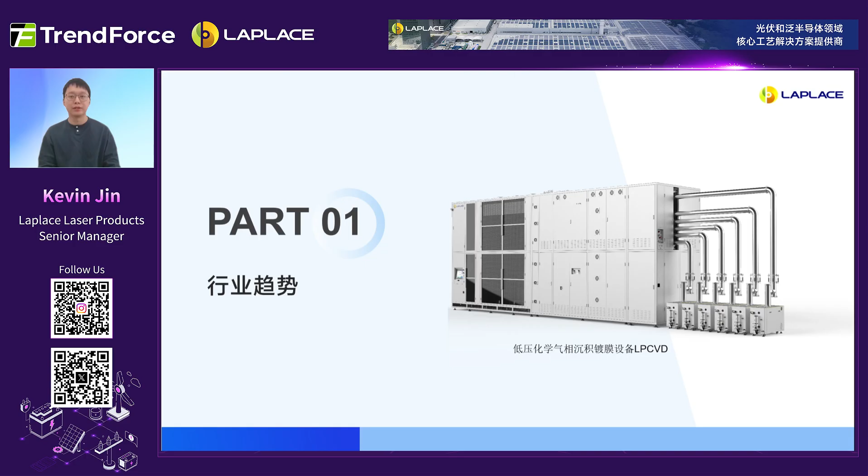Next I will present a report on the role of laser technology in N-type high-efficiency photovoltaic PV cells and share our achievements. The report will be divided into 4 sections: industry trends, efficiency enhancement pathways, solutions, and Laplace introduction. Part 1. Industry trends. I will mainly introduce the mainstream solutions for the N-type battery technology roadmap and the application of laser technology within them.

First, regarding the industry background, domestic demand for high-power module tenders is gradually increasing. Currently, the Chinese PV market's demand for high-power modules is showing a growth trend and has become the preferred choice for end customers. According to TrendForce data, in November 2025, tenders for modules over 570 W accounted for more than 60% of the scale, and demand for power ratings over 600 W and 700 W continues to rise.

Leading companies such as Trina Solar, LONGi Green Energy, and Jinko Solar have achieved mass production of modules over 700 W and are continuously improving product performance through technological upgrades. In terminal projects, the application scale of modules over 700 W is gradually expanding. Their advantages of high power, high efficiency, and low levelized cost of electricity, LCOE, are driving the industry to transition from scale expansion to quality improvement.

Overall, the current development model of the PV industry is shifting from extensive scale expansion to lean manufacturing driven by technological innovation. In terms of competition, it is shifting from homogenization and cost involution to achieving product premiums through differentiated technological paths. The increase in demand for high-power modules is the result of multiple factors, including policy support, technological progress, and improved economic viability.

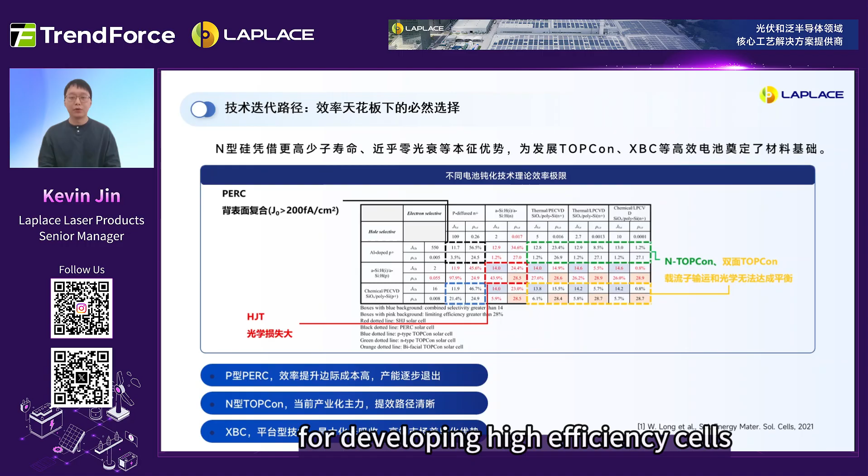The application of 210 mm large-size silicon wafers, along with standardization and promotion, optimizes module formats. While maintaining high power, it reduces module size and weight, improving installation convenience. Looking at the technology iteration path, N-type high-efficiency PV cells are an inevitable choice under the efficiency ceiling. N-type silicon, with its intrinsic advantages such as higher minority carrier lifetime and near-zero light-induced degradation, lays the material foundation for developing high-efficiency cells like TOPCon and BC back contact.

The chart below shows the theoretical efficiency limits under different passivation technology routes. It can be seen that for early P-type PERC cells, the theoretical efficiency limit is 24.5%. The back surface recombination current density, J0, being greater than 200 fA/cm² is the main constraint on efficiency. In industrialization, as efficiency approaches the theoretical limit, the marginal cost of efficiency improvement is high, and capacity is gradually being phased out. For HJT, heterojunction, cells, they use intrinsic amorphous silicon plus doped amorphous silicon for passivation. The main constraint on efficiency is high optical loss, with a theoretical efficiency limit of 28.1%.

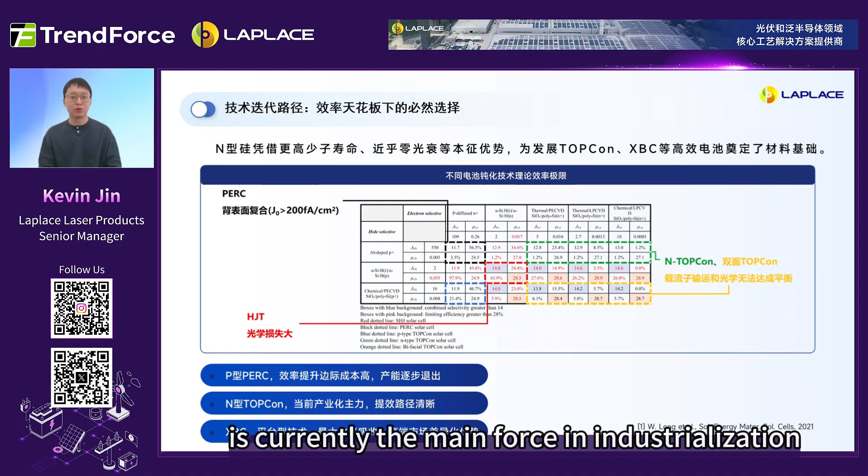For TOPCon cell technology, if a double-sided tunneling oxide layer plus polysilicon layer passivation is used, the conversion efficiency upper limit can reach 28.7%. Therefore, N-TOPCon is currently the main force in industrialization, with a clear efficiency enhancement path. However, its main efficiency constraint is the inability to balance carrier transport and optics. If we transfer both the N-type and P-type structures of TOPCon to the back of the cell, we naturally transition to the BC route. Through the BC platform technology, optical absorption can be maximized, and the conversion efficiency upper limit can reach 29.1%, which can leverage advantages in high-end market differentiation.

Regarding industrialization pathways, in 2025, N-type TOPCon, with over 75% market share and mature cost-effectiveness, firmly holds the mainstream position. BC technology, with a share approaching 10% and higher efficiency, targets the high-end distributed market.

According to statistics from the China Photovoltaic Industry Association, CPIA, from 2024 to 2030 regarding the market share of different battery technology routes, in the next 5 years, N-type TOPCon battery technology will occupy the mainstream position, while BC technology will also see rapid growth and large-scale expansion.

Looking at the trend of production line investment costs for different battery types, due to first-mover advantages, TOPCon cells have lower initial equipment investment costs. For BC technology, the investment cost per GW in 2024 was about 300 million RMB. However, with the gradual localization and promotion of equipment and the maturity of the battery technology route, the investment cost per GW will also see a rapid decline.

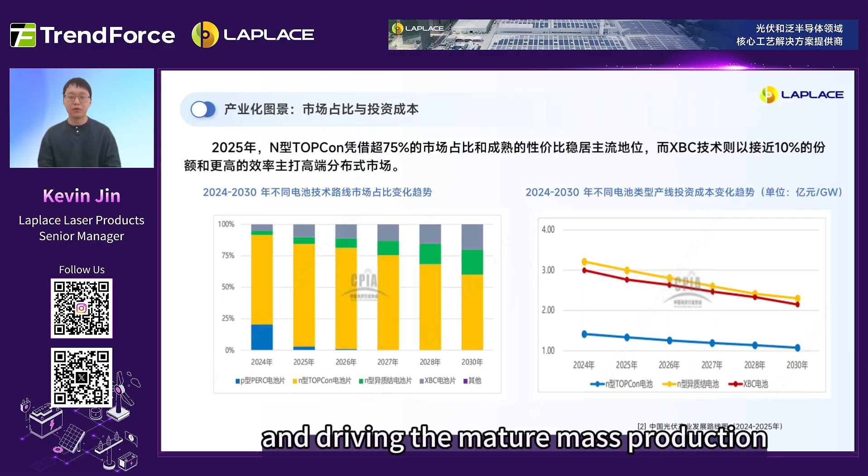Overall, as core process equipment gradually completes localization and replaces iterative technologies, rapid cost reduction can be achieved for technology iterations. From the perspective of trends, laser technology has been deeply embedded in the development of N-type high-efficiency cells from the beginning. Its high precision, low damage, and controllability are key supports for meeting sub-micron precision processing requirements and driving the mature mass production of technologies like TOPCon and BC.

Looking at the development path of laser technology, early TOPCon SE, selective emitter, technology used lasers to achieve local high temperatures for heavy doping in metallization areas. Moving to LECO, laser enhanced contact optimization technology, lasers play a role in carrier excitation. Under reverse voltage, high current density local hotspots are formed at the silver-silicon interface, promoting the formation of silver-silicon alloy junctions and reducing contact resistivity.

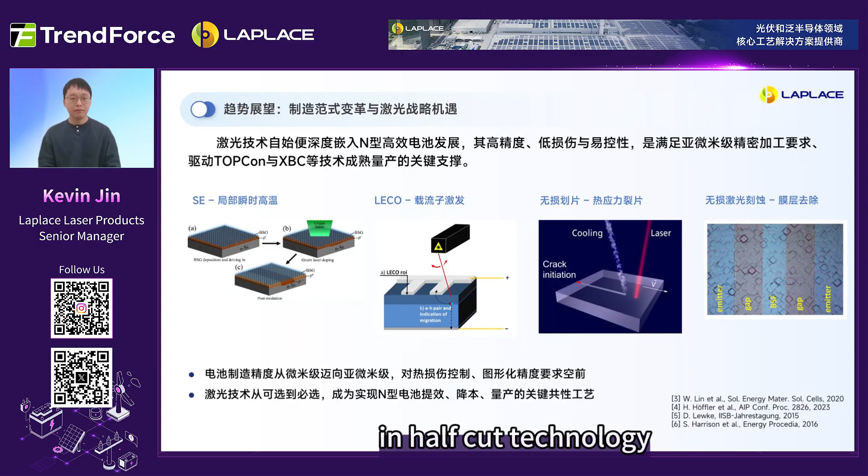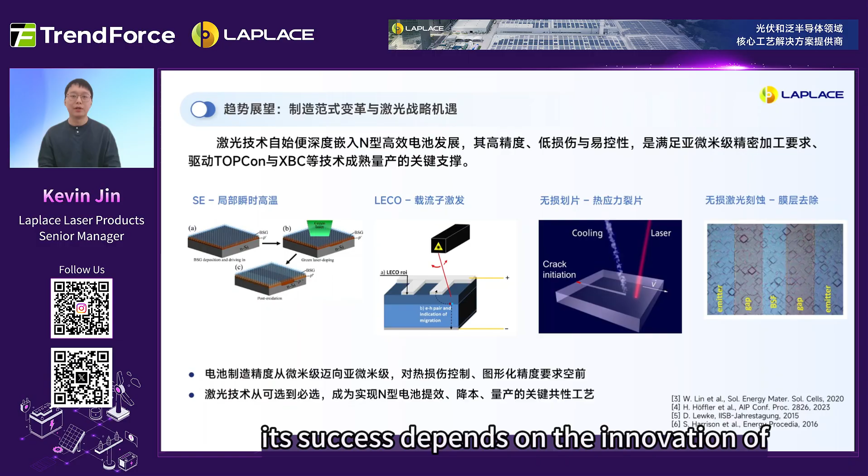In half-cut technology, local heating by laser and subsequent cooling jets create thermal stress gradients, achieving high-quality, non-destructive slicing through thermal stress cleavage. Currently, laser etching is widely used to achieve precise removal of local film layers via laser. Fundamentally, the N-type transition is a manufacturing revolution. Its success depends on the innovation of underlying tools like lasers that can achieve precision, flexibility, and low-damage processing.

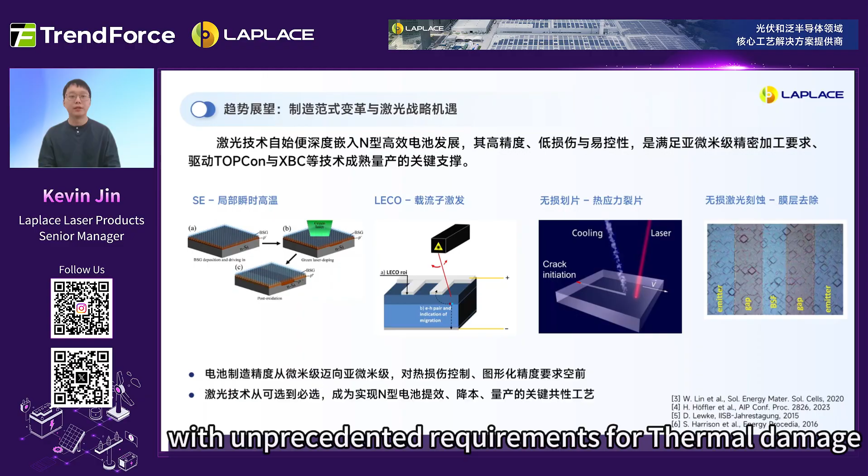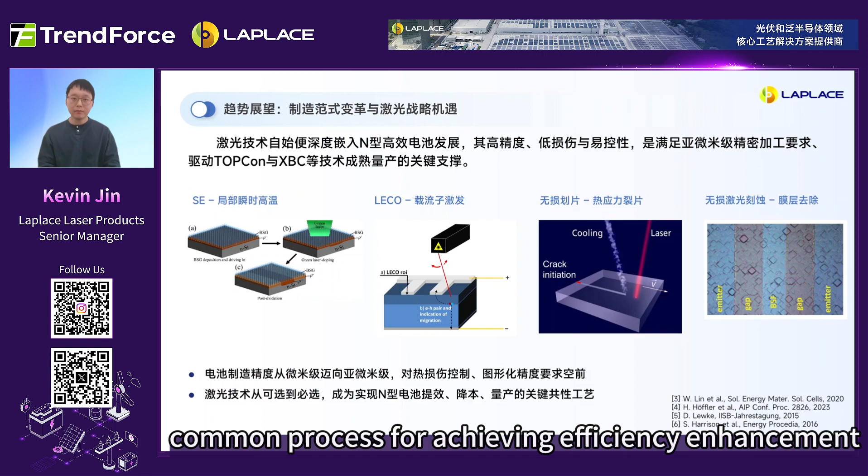From the battery manufacturing route perspective, manufacturing precision is moving from the micron level to the sub-micron level, with unprecedented requirements for thermal damage and patterning precision. Laser technology has moved from optional to mandatory, becoming a key common process for achieving efficiency enhancement, cost reduction, and mass production of N-type cells.

Part 2. Efficiency Enhancement Pathways. I will take TOPCon polyfinger, TBC, as an example to detail its efficiency enhancement methods and the necessity of lasers within them. First, a brief introduction to the TOPCon battery technology route. The high efficiency of TOPCon cells stems from the core passivation contact structure of the tunneling oxide layer. Through the structural synergy of an ultra-thin silicon oxide layer and a doped polysilicon layer, it achieves excellent chemical passivation, field-effect passivation, and carrier selective transport, thereby significantly reducing surface recombination velocity and improving open circuit voltage and conversion efficiency.

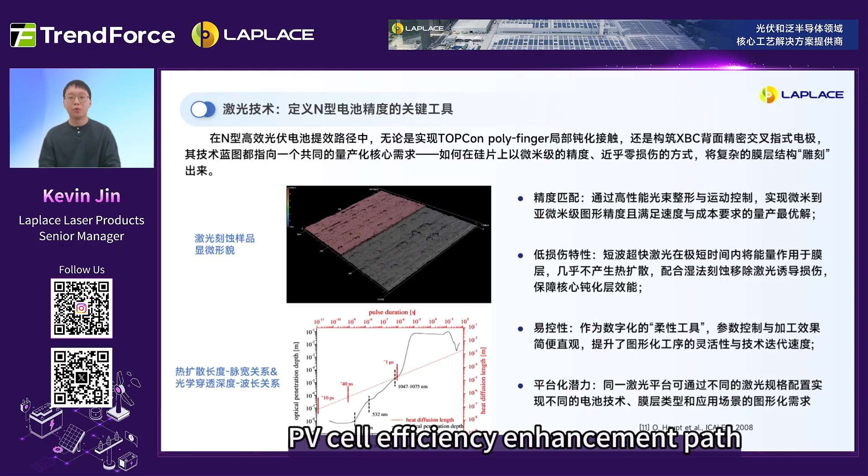Part 3. Solutions. I will focus on Laplace's process solutions and equipment status in laser etching. First, in the N-type high-efficiency PV cell efficiency enhancement path, whether realizing the TOPCon polyfinger local passivation structure or constructing the precise interdigitated electrodes on the back of BC cells, the technical blueprint points to a common core requirement for mass production: how to carve complex film structures on silicon wafers with micron-level precision and near-zero damage. Laser technology matches this application perfectly.

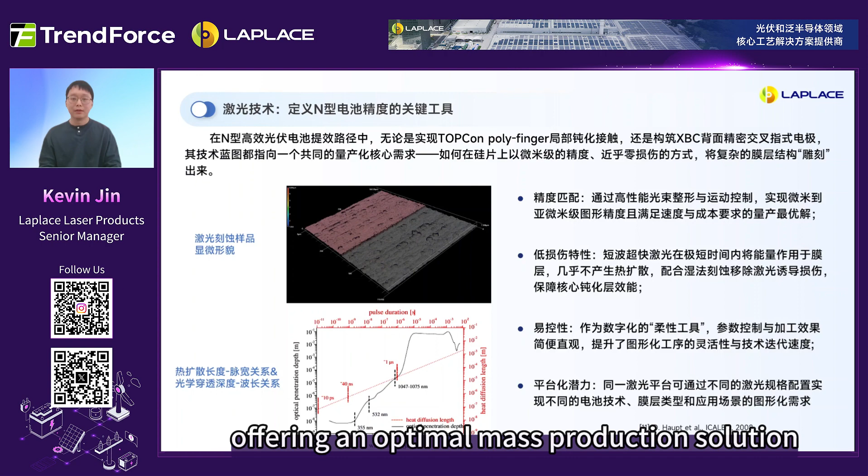First, regarding precision matching. Through high-performance beam shaping and motion control, laser technology can achieve micron to sub-micron patterning precision, offering an optimal mass production solution that meets speed and cost requirements. The image on the left shows the microscopic morphology of a laser-etched sample. It can be seen that it achieves micron-level patterning precision and sub-micron etching depth requirements, with sharp steps between the laser and non-laser areas.

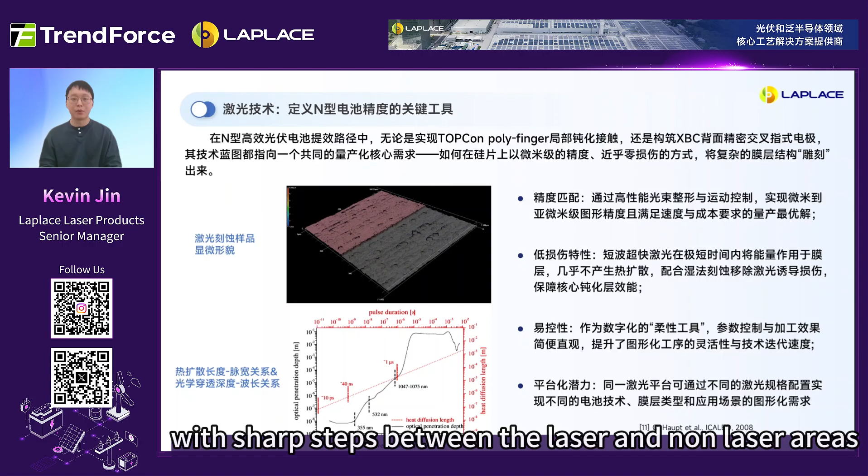Regarding damage characteristics, using short wavelength ultra-fast lasers, energy is applied to the film layer in an extremely short time, producing almost no thermal diffusion. Combined with wet removal of laser-induced damage, it ensures the efficacy of the core passivation layer. This can be seen in the relationship between thermal diffusion length and pulse width, and optical penetration depth and wavelength in the charts below.

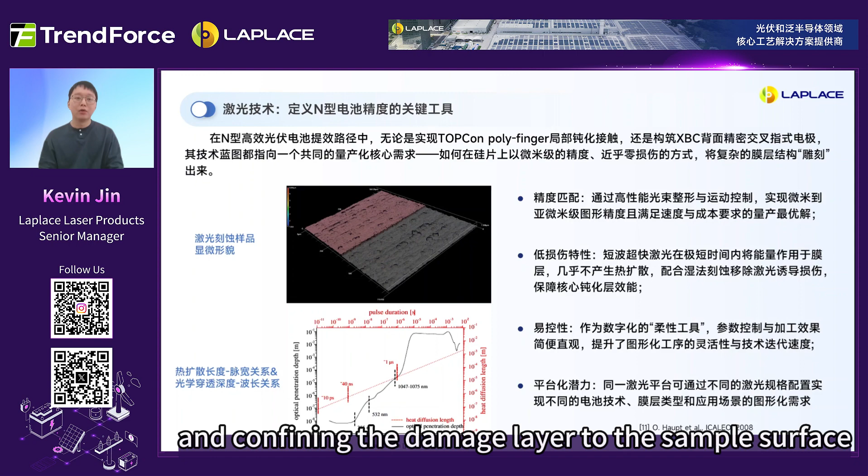When we use short wavelength lasers, such as 532 nanometers green light, or even 355 nanometers UV, we can compress the optical penetration depth to within a few microns or even tens of nanometers, thereby minimizing laser-induced damage and confining the damage layer to the sample surface. From the relationship between pulse width and thermal diffusion length, in our laser etching applications, using picosecond pulse widths sub 10 ps ensures a shorter thermal diffusion length and minimizes laser damage.

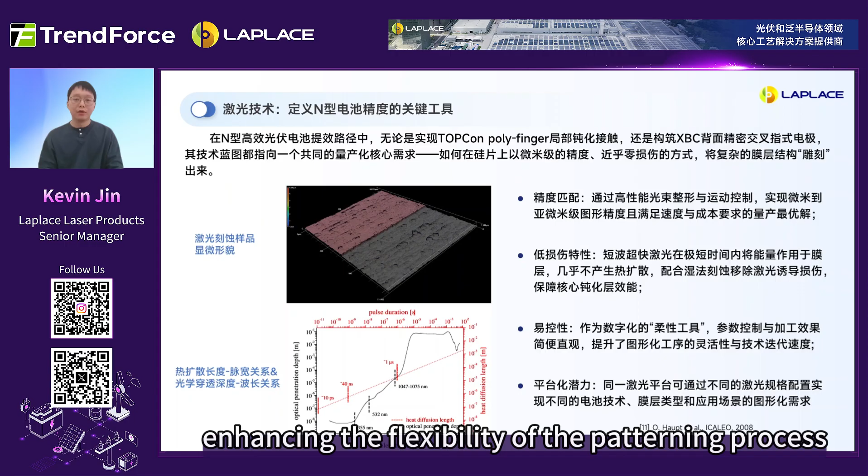Regarding controllability, as a digitized flexible tool, laser technology offers simple and intuitive parameter control and processing effects, enhancing the flexibility of the patterning process and the speed of technological iteration. Regarding platform potential, the same laser platform can achieve patterning requirements for different battery technologies, film types, and application scenarios through different laser specifications and configurations.

Regarding core process solutions, they are mainly divided into the TOPCon polythinning solution and the BC patterning solution. First, the TOPCon polythinning solution. It uses laser etching to selectively remove the polysilicon layer in non-contact areas on the back, reducing parasitic absorption and increasing short-circuit current density and conversion efficiency.

In the laser etching process, ultra-fast lasers are used to open the PSG mask in non-contact areas. Then, subsequent wet processes etch away the film structure under the laser area and remove the laser-induced layer, forming a patterned effect. After applying this process, mass production can achieve an increase in short-circuit current density. JSC is greater than or equal to 0.2 milliamperes per square centimeter. Conversion efficiency improvement is greater than 0.15%, and bifaciality improvement is greater than 4%.

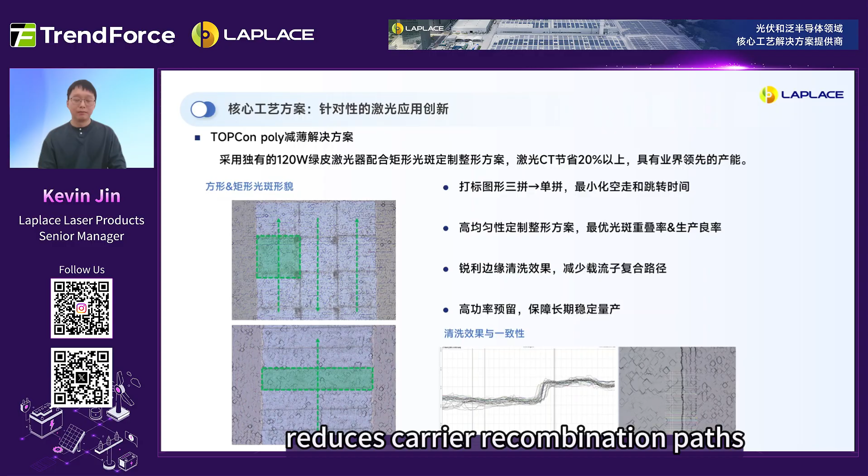In the diagram below, it can be seen that after laser processing and subsequent wet etching, we can form sharp edge steps with good consistency. Sharp edge definition reduces carrier recombination paths. Additionally, the unique 120W high-power laser provides high-power redundancy, ensuring long-term stable mass production.

Regarding the BC patterning solution, laser technology with micron, submicron precision, and ultra-low thermal damage processing achieves precise P-region and N-region patterning and uniform gap areas on the back of BC cells, ensuring excellent electrical isolation and carrier collection efficiency.

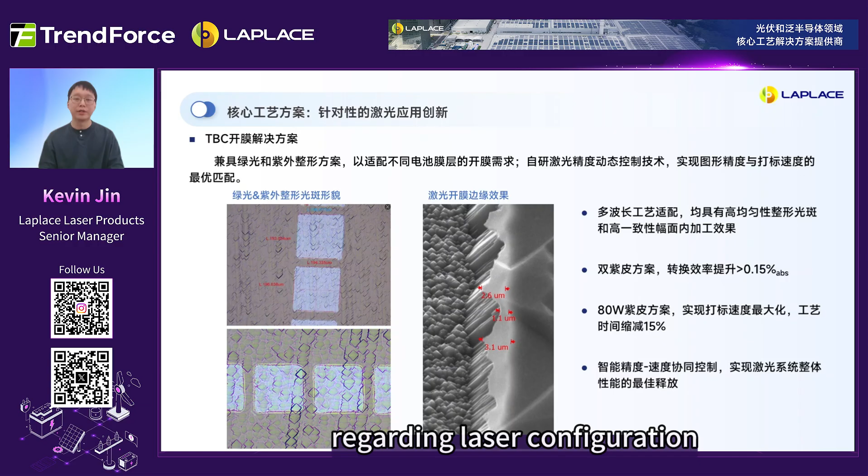From mass production data, Laplace's laser solution features typical pattern precision of plus or minus 10 micrometers, alignment precision of plus or minus 5 micrometers, line width consistency of plus or minus 7.5 micrometers, and isolation zone consistency of plus or minus 15 micrometers.

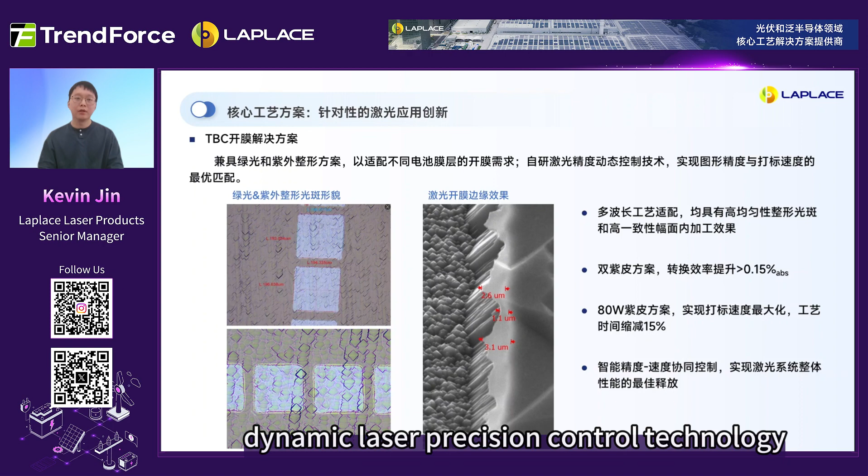Regarding laser configuration, Laplace has both green light and UV shaping solutions to adapt to different battery film opening needs. Meanwhile, self-developed dynamic laser precision control technology achieves the optimal match between pattern precision and marking speed. The image on the left shows our green light and UV spot shapes. It can be seen that both shaping solutions have good internal spot uniformity and ensure good processing consistency within the field of view.

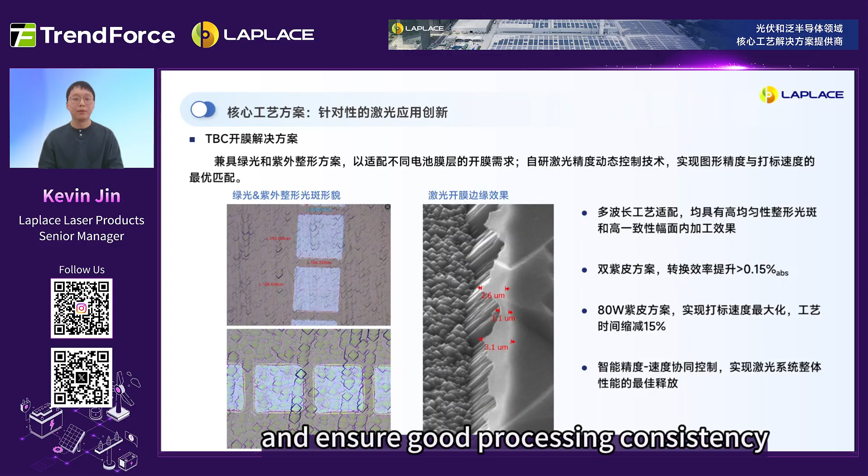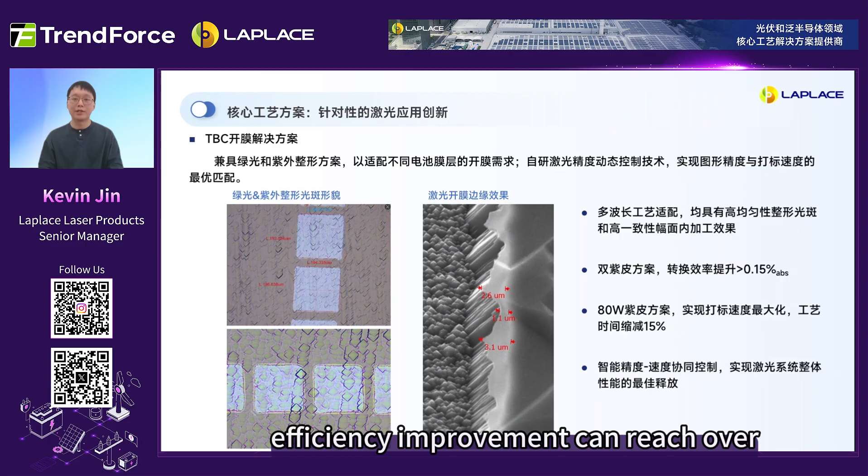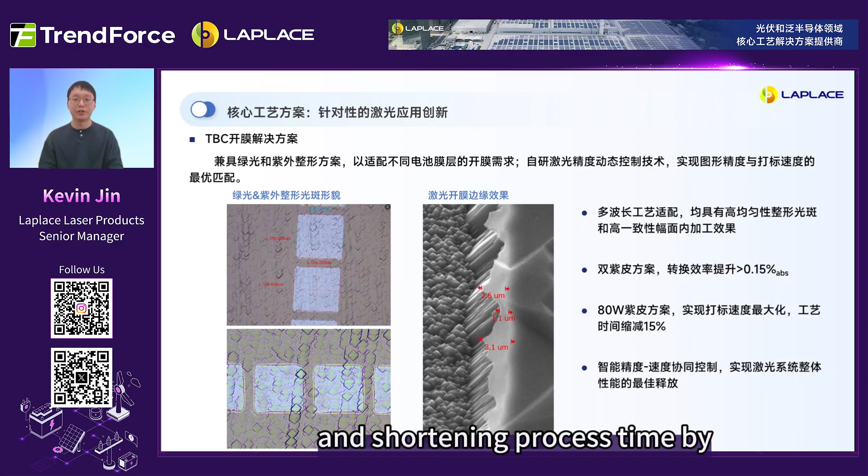Simultaneously, Laplace can provide a dual UV picosecond solution. Compared to the green picosecond solution, the overall conversion efficiency improvement can reach over 0.15%. The UV picosecond solution can provide 80 W of UV power, maximizing marking speed and shortening process time by 15%. Regarding control, collaborative control of intelligent precision and speed enables the optimal release of the laser system's overall performance.

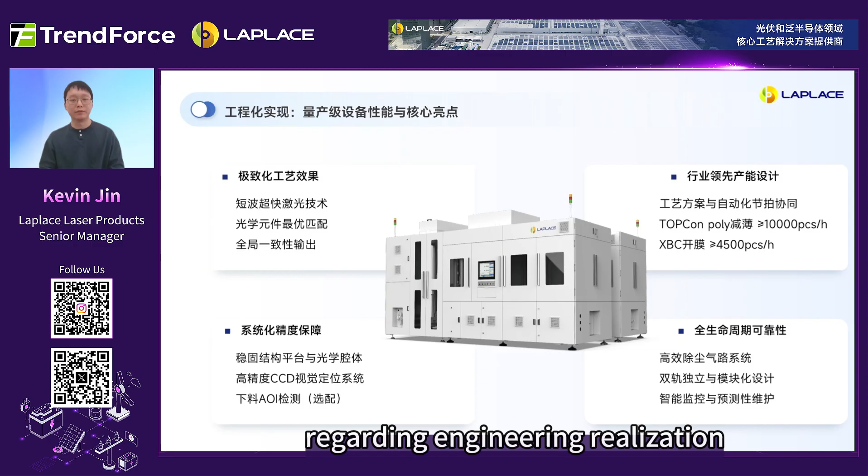Regarding engineering realization, Laplace can provide mass production level laser etching equipment. Its main highlights lie in incorporating the aforementioned short wavelength ultra-fast laser technology and optimally matching optical components to ensure globally consistent output, guaranteeing ultimate overall process effects.

In terms of capacity design, excellent process solutions synergized with automation cycle times can achieve a capacity of greater than or equal to 10,000 wafers per hour in TOPCon polythinning applications. In BC patterning, it can achieve a capacity of greater than or equal to 4,500 WPH. Increasing single machine capacity reduces the quantity of equipment required per GW, thereby lowering the investment cost per GW.

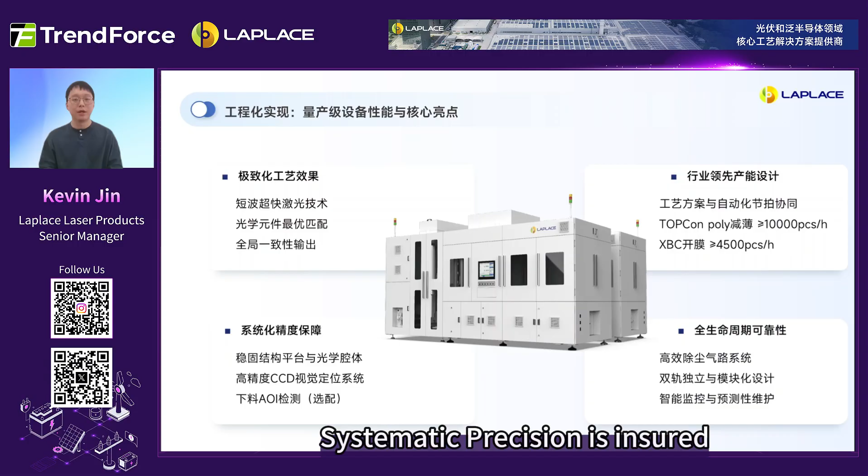Regarding precision, the process section uses granite platforms and optical cavities. Coupled with high-precision CCD vision systems and inline AOI, automated optical inspection, systematic precision is ensured. Regarding reliability, it is equipped with an independent high-efficiency dust removal system. Regarding design, dual-lane independent and modular design, equipped with intelligent monitoring and predictive maintenance, ensures reliability throughout the life cycle.

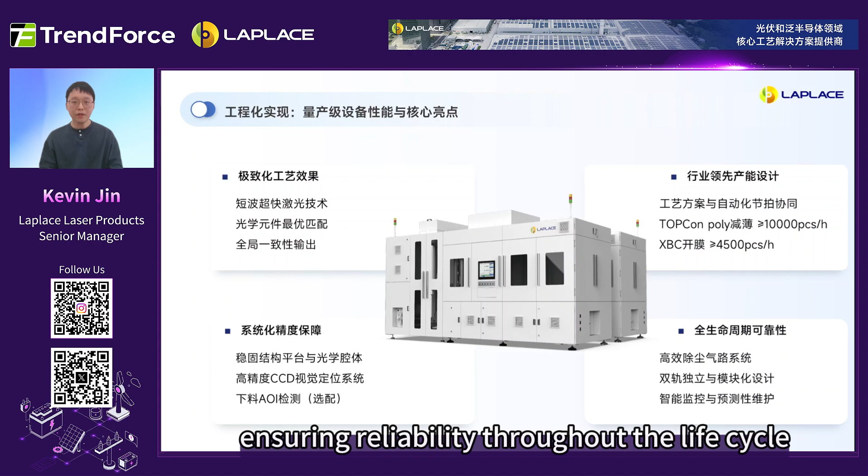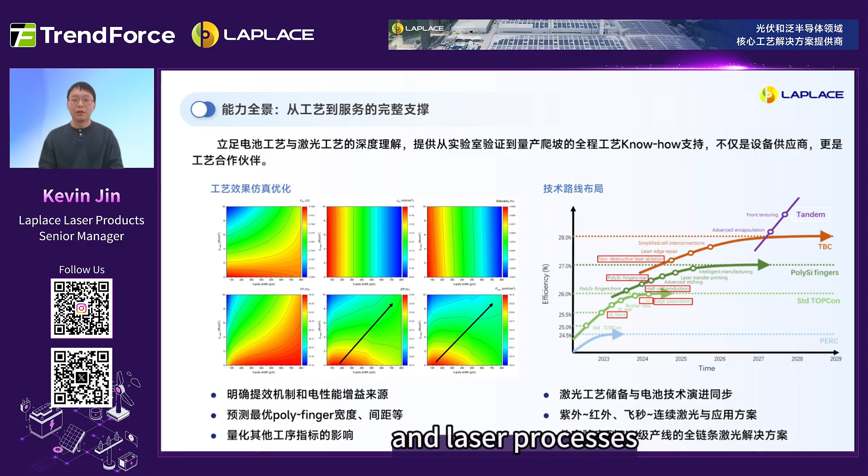Regarding capability panorama, Laplace provides complete support from process to service. Based on our deep understanding of battery processes and laser processes, we offer full process know-how support from lab verification to mass production ramp-up. We are not just an equipment supplier, but a process partner.

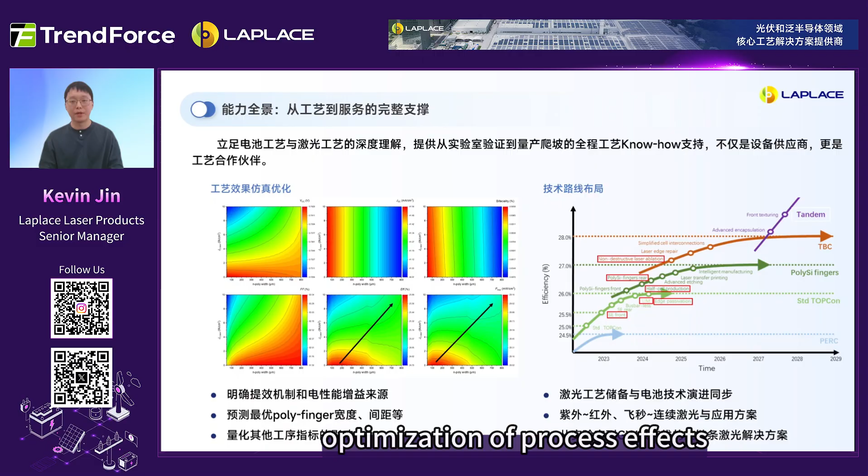The image on the bottom left shows the simulation optimization of process effects in TOPCon poly finger. Through simulation optimization, we can clarify its efficiency, enhancement mechanism, and the source of electrical performance gains, and predict optimal poly finger width, spacing, etc., and quantify the impact of other process indicators.

Regarding laser configuration, we provide solutions ranging from UV to infrared, femtosecond to continuous wave lasers and their applications. We possess a full-chain laser solution capability from the laboratory to offline machines and inline production lines. Part 4. Laplace Company Introduction.

Laplace is a leading provider of core process equipment and solutions for high-efficiency PV cells. Our main business involves the R&D, production and sales of high-performance thermal processes, coating, laser, and supporting automation equipment required for PV cell manufacturing. We also provide customers with semiconductor discrete device equipment and supporting products and services. The company is committed to enhancing innovation capabilities, cultivating creativity, and continuously assisting the development of the PV industry.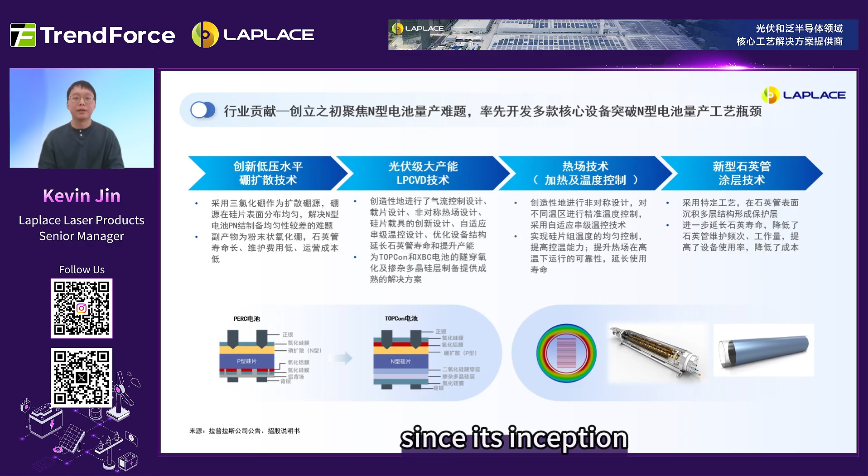Since its inception, Laplace is focused on the mass production challenges of N-type batteries. We were the first to develop several core equipment to break through the process bottlenecks of N-type battery mass production, including innovative low-pressure horizontal boron diffusion technology, PV-grade high-capacity LPCVD technology, thermal field technology and its heating, temperature control, and new quartz tube coating technology. The company will continue to deepen underlying core technologies such as heat, gas, electricity, and light, actively supporting every round of PV battery technological progress.

In the TOPCon route, we were the first to help leading customers achieve large-scale mass production of the TOPCon route. In the industry, we pioneered breaking through the equipment technology bottleneck for N-type batteries, promoting the implementation and mass production of N-type battery boron diffusion and LPCVD equipment.

In TOPCon technology upgrades, we were the first to support downstream TOPCon Plus technology upgrades and iterations. Downstream module efficiency further broke through 23.5% and power reached 635 W. Simultaneously, we developed core process equipment such as edge passivation lasers and poly thinning equipment to further improve battery conversion efficiency.

In the BC battery route, we were the first to help leading customers achieve large-scale mass production of technology routes like HPBC and ABC, continuously promoting BC technology upgrades. Downstream module efficiency continues to rise to 24.4%, and power reaches 660 W. The mass-produced BC battery processes generally adopt the company's LPCVD solution for the preparation of tunneling plus doped polysilicon layers.